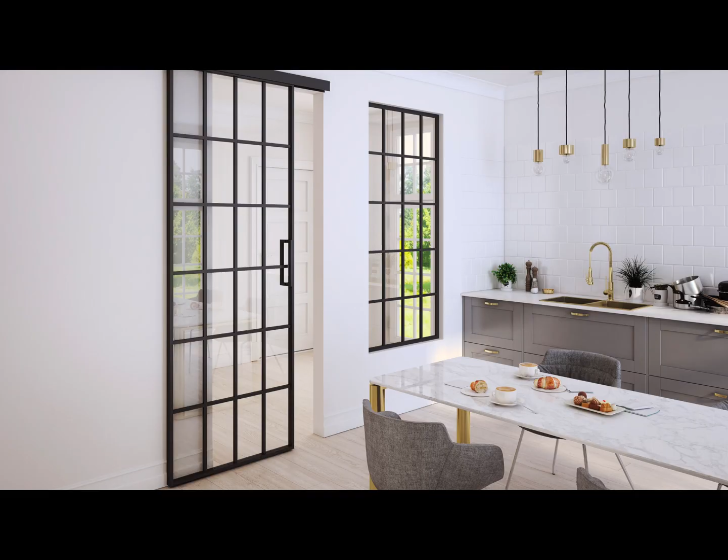Today, we will present our LUMI library, where you can create a full project with visualization, pricing, and production files in just a few minutes.

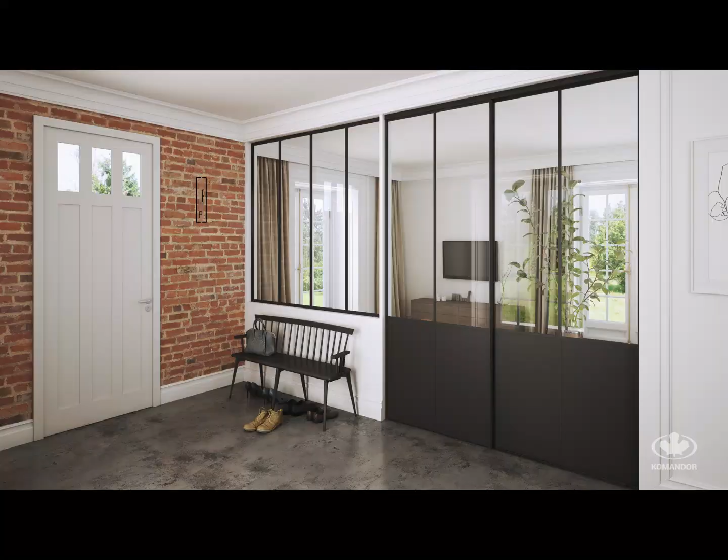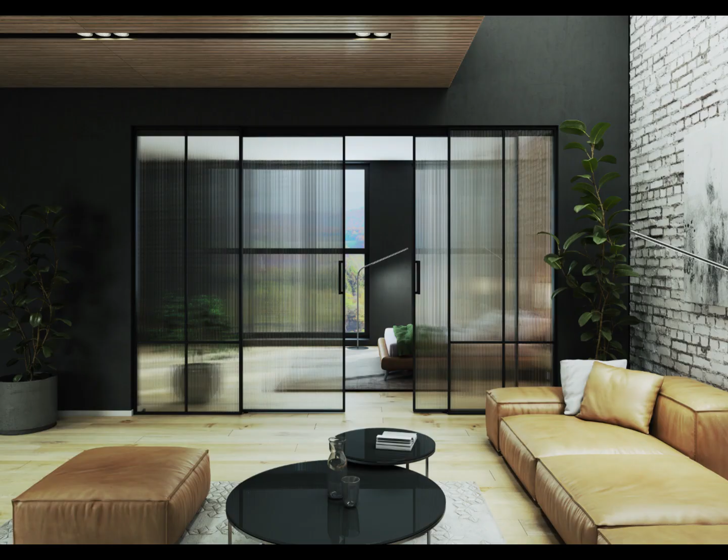LUMI is a system of internal aluminum glass partitions in the form of functional dividing walls with sliding and swing doors, fixed display cabinets, or passage doors in the frame which fit into the modern design. Its specificity and the materials used allow you to use LUMI in both classic and loft interiors on the basis of an interesting looking partition, or dividing the room into separate zones.

The advantage of the system is its minimalism, transparency, and freshness, thanks to which it is possible to easily maintain spaciousness, the flow of natural light, and the unique character of the interior in arranged, separated, or closed rooms.

LUMI is available in natural anode and matte black, which are an interesting contrast to the glass and furniture panels used as insert material. Original partitions and doors using colored, frosted, transparent, or reinforced glass add lightness and spaciousness to interiors, allowing for the arrangement of fully personalized spaces and bold design visions.

I invite you to the presentation of Komandor Software, where you will see how easy it can be to design the LUMI system. Run the Komandor Software application.

Select a new project and enter its name. Select the Komandor Professional Library. In the next step, specify the room dimensions: height, width, and depth.

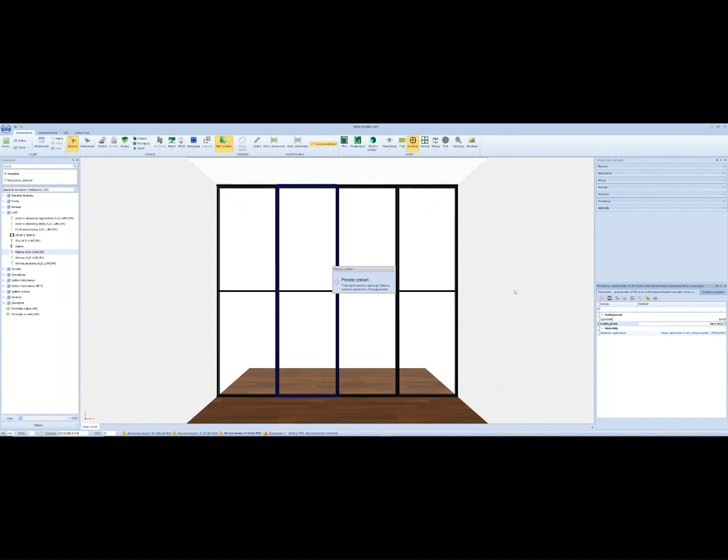From the tray, select the LUMI wall. Modify the type to a wall with hinged door. Select the second panel, and set its type to a double hinged door with a transom. Select the wall again and change the number of panels to 3.

Change the type of handle. To edit the default dividing frames, run the front editor. Delete or modify the default dividing profiles on the outermost panels, or add new ones. This will allow them to unfold automatically. Perform the same steps for swing doors as with suspended top-hung doors.

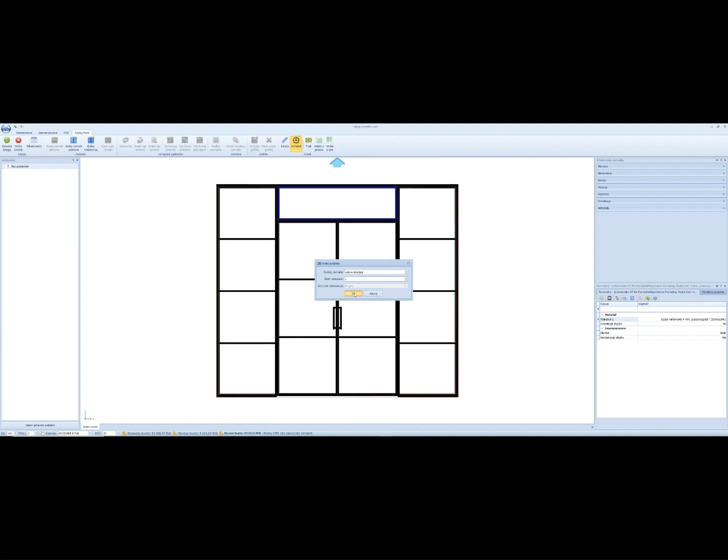In the case of a side light, use a vertical or horizontal dividing frame. Change the height of the swing door. You can use animation.

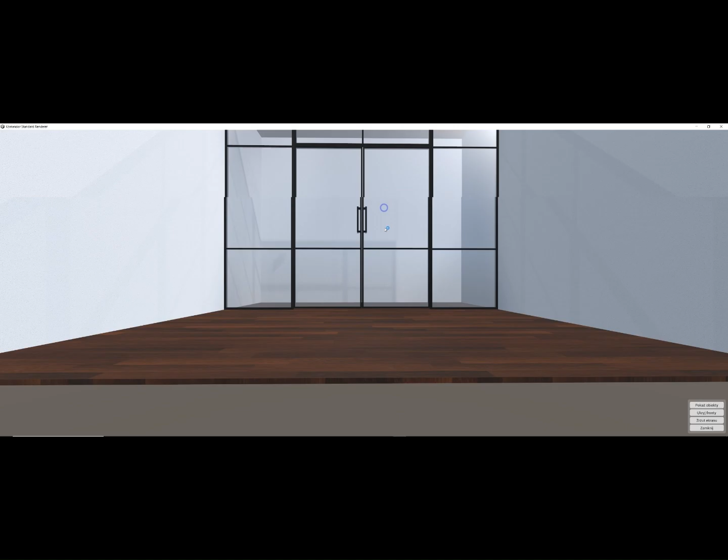For better visualization of the project, use the renderer. After setting the camera, take screenshots that will be visible on the order.

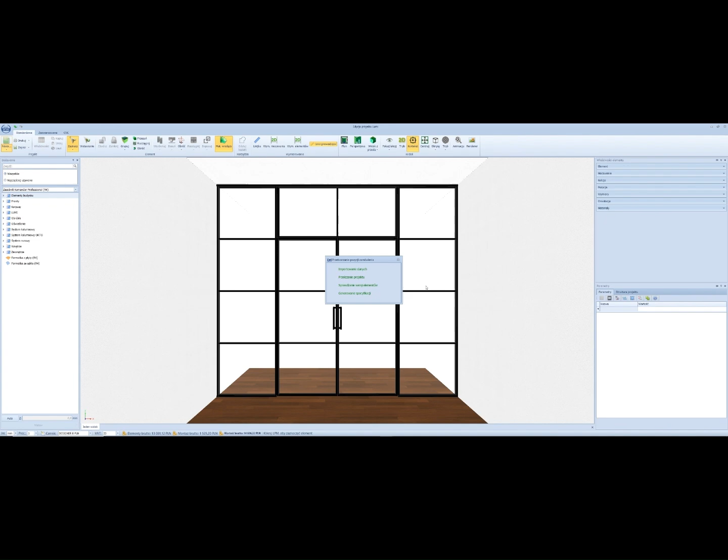In the order, select a customer from the database or add a new one. Go to Order Management and print the order you created. On the order, we can see the LUMI wall specifications and previously created screenshots.

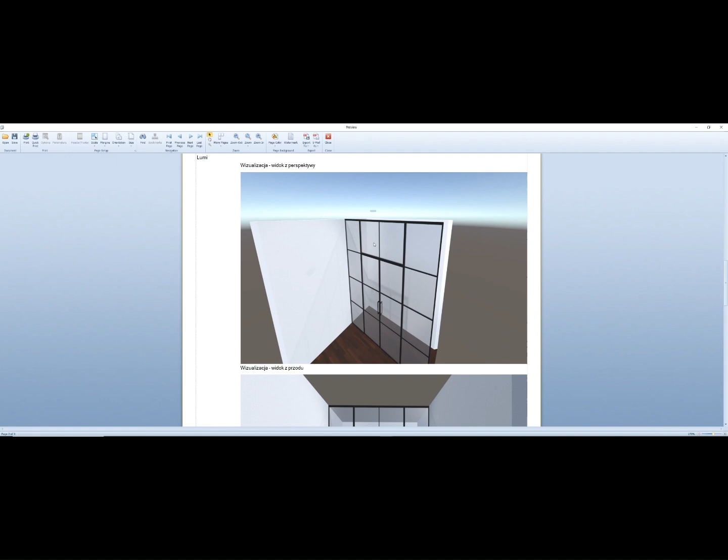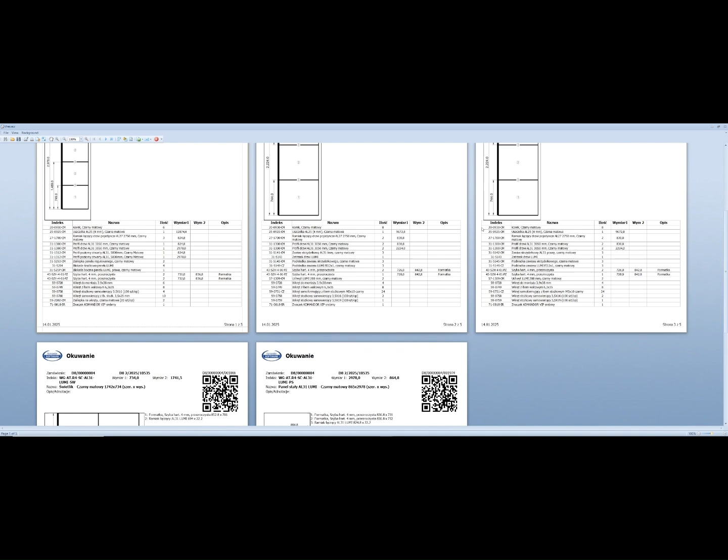In the basic version, you can print simplified production documents. In the first step, we see the distribution of raw materials, then the fitting of panels and door leaves. In the last document, we see the completion of the order.

In this way, in just a few minutes, we designed the LUMI partition wall from the above implementation.

Now let's design something much more advanced together. Start a new project and give it a name.

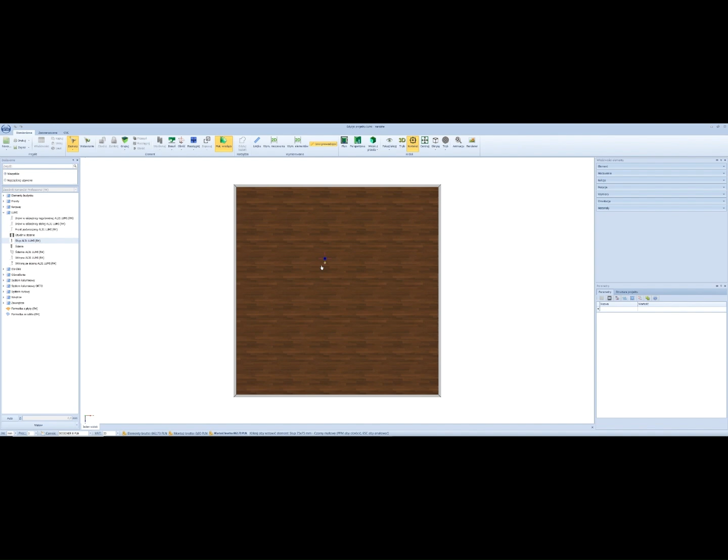Select the Komandor Professional Library. Specify the room dimensions and height. Select the LUMI column from the container. Specify its position using a ruler in 2D mode.

On the right side of the column, insert a LUMI wall. In the next step, insert LUMI walls in the lower and upper part. You can rotate them with the right mouse button.

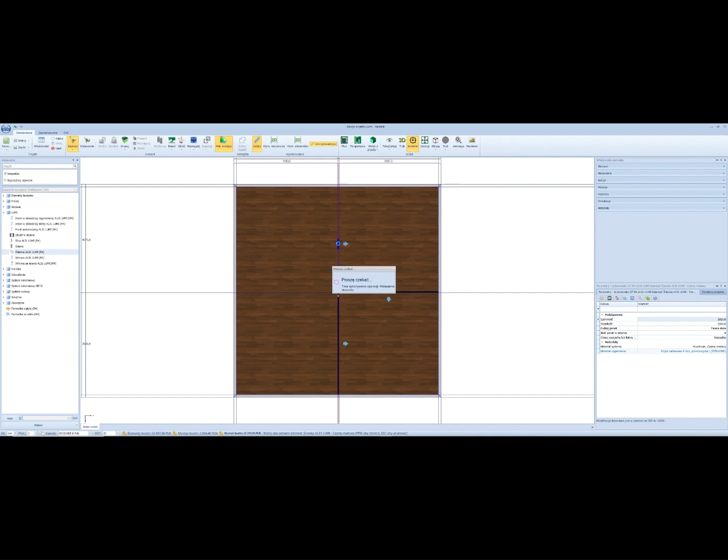Select the two left LUMI walls and change their type to a wall with swing doors. Select the extreme panels and change their type to swing doors.

Select the right panel and change its design to right pull. Select both panels and change the type of handle.

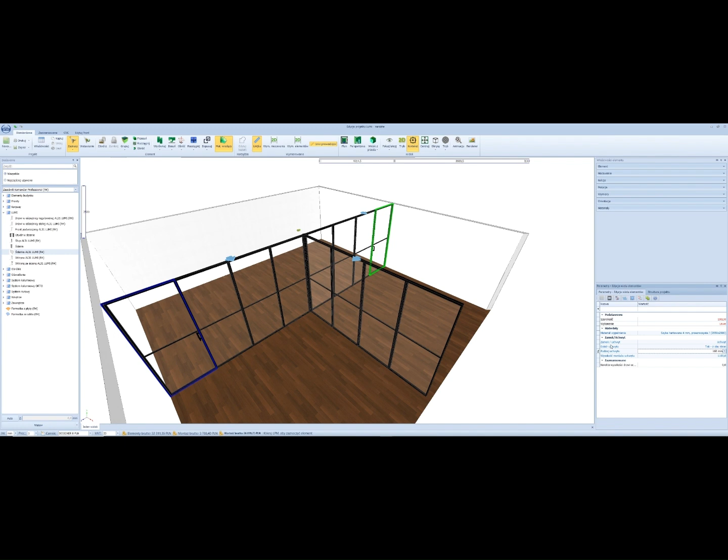Select the right wall and change its type to a wall with suspended panels. Set the number of the suspended panels. In the next step, match the type of handle to the rest of the walls.

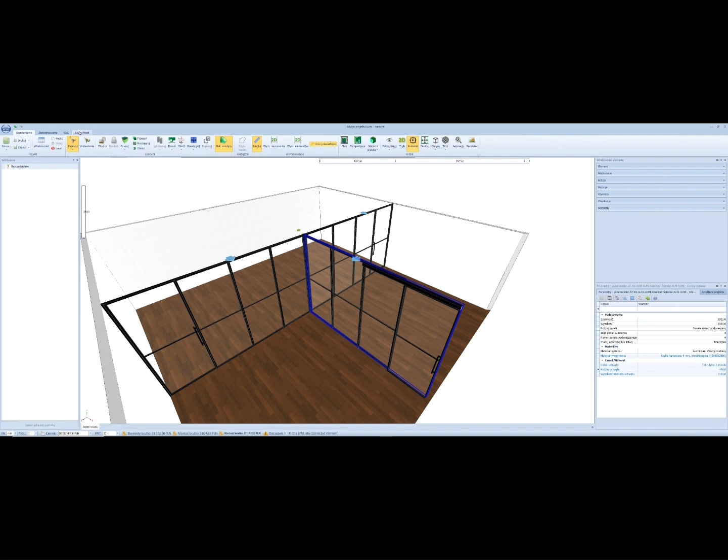Start the front editor to change the default transoms. Delete the default transoms. In the next step, select all infills and add a grid.

Delete the lower vertical profiles. Then select the lower inserts and change their material to black glass. Confirm the changes.

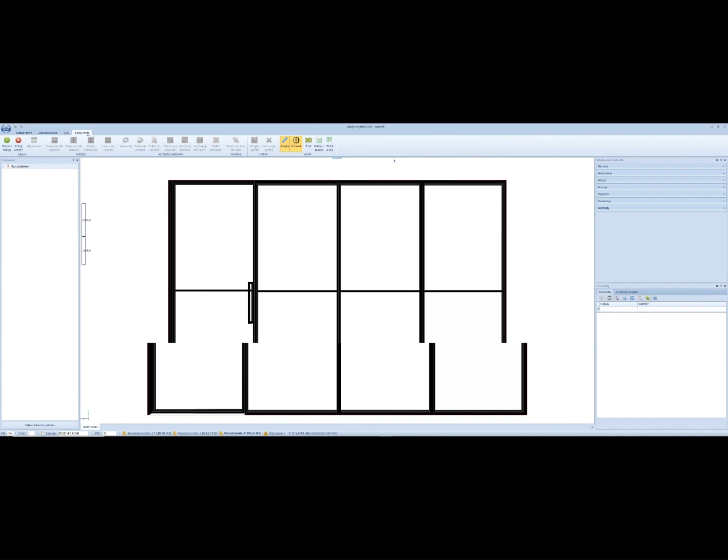Select the next wall and run the front editor. Select the default frames; you can use the Shift key. Select the fillings and insert a grid.

Remove the lower vertical trims. Select the bottom inserts and change their material to black glass.

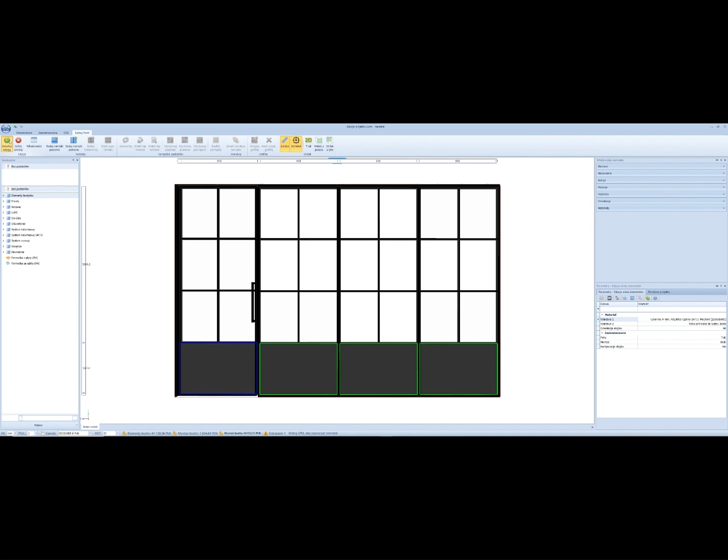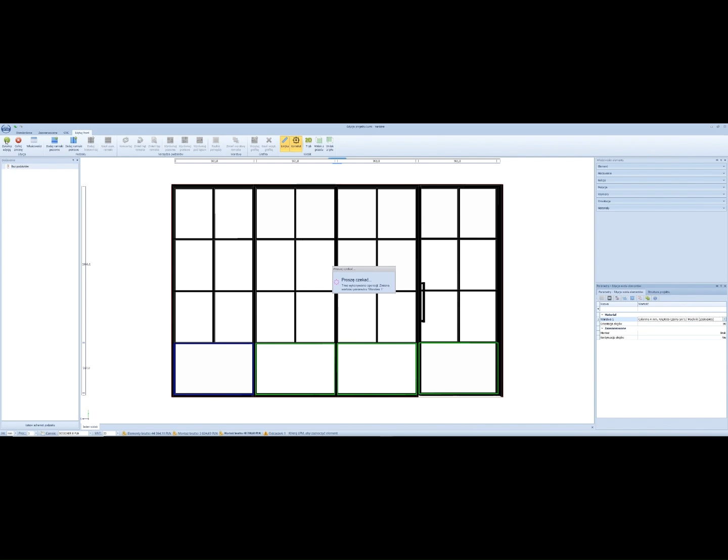In the next step, run the front editor for the last wall and perform the same steps as the previous ones. Confirm the changes. For better visualization, you can use the renderer.

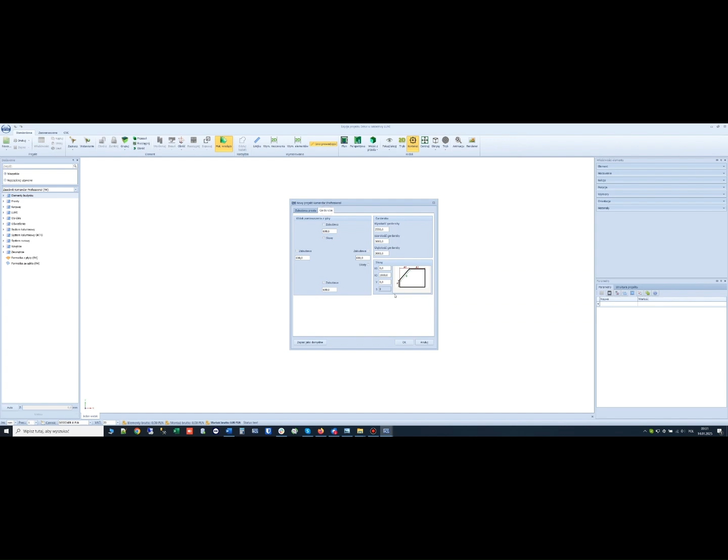Finally, let's design a door with a frame in the LUMI system together. Create a new project and enter its name. Then select the Komandor Professional Library and specify the main dimensions of the room.

To divide the room, select a wall from the container, then select the door in the LUMI frame. In the Parameters window, we can see all the parameters concerning the door.

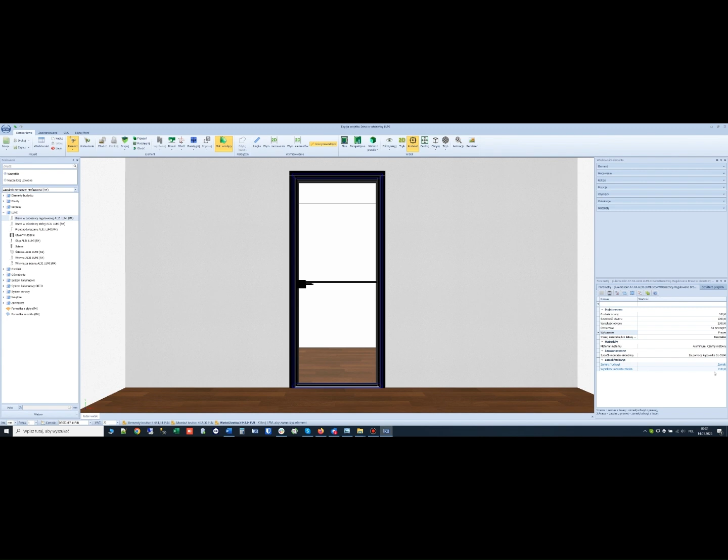To change the default divisions, run the front editor. Then, when inserting the grid, select the appropriate number of vertical and horizontal frames. For better visualization, you can use the rendering module.

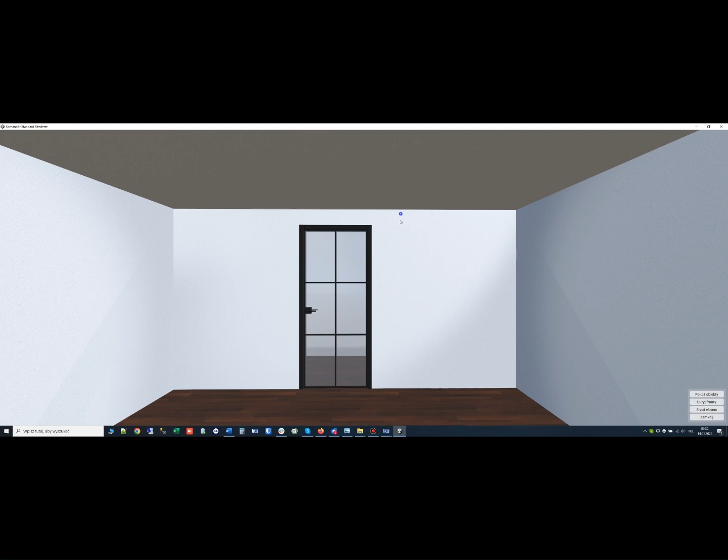In a few minutes, we have just designed 3 different LUMI system developments in the client's Komandor software program, with full production and assembly documentation.

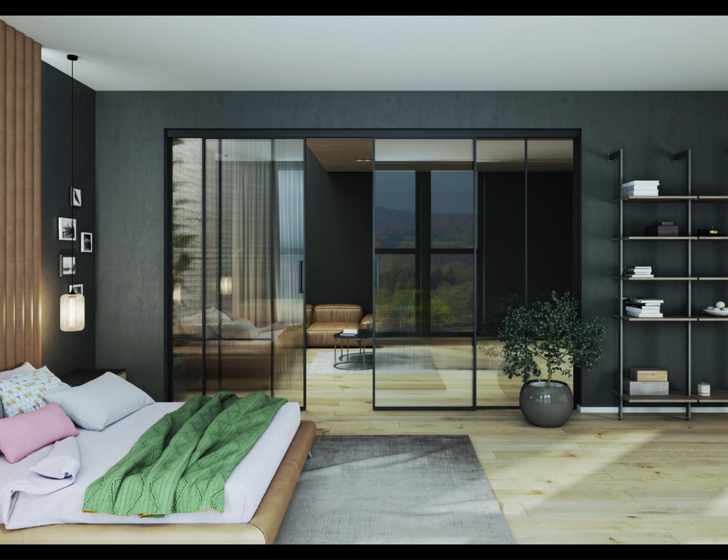That is why we can confidently say today that Komandor software is the future of the furniture industry: minimizing costs, maximizing production, and better control of business processes.